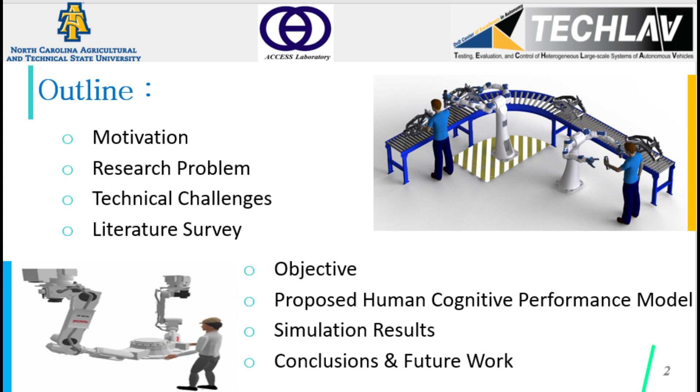This research is motivated by the rapid developments in robotic technologies, which have laid the grounds for the use of robots to develop a variety of applications based on human-robot interactions. These applications range from manufacturing, packaging, healthcare, warehouse management, and cybersecurity, to their economic impacts on future developments and intellectual and cognitive skills. It is not far that humans and robots will collaborate at the workspace to achieve common goals to improve the efficiency in handling the shared tasks in a human-friendly and secure work environment.

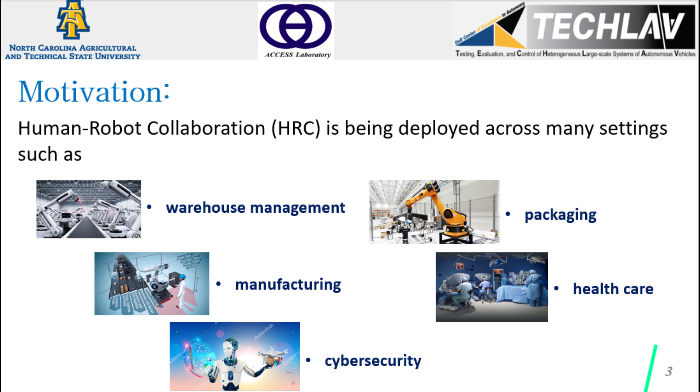The integration of human decision-making into a human-robot collaboration framework minimizes the chances of deviations in job handling from the expected and desired behaviors through conceptual coordination against the involved uncertainties. Before discussing the technical challenges of this paper, let's briefly review our research problem.

In a human-robot collaboration setting, human cognitive performance can be impacted by human cognitive workload, robot performance, and human physical performance. Then, the research problem is to develop a mathematical model to describe the relationship between human cognitive performance and the contributing factors, including human cognitive workload, robot performance, and human physical performance. Further, we are interested in understanding the relationship between human cognitive performance, task complexity, and the robot's performance.

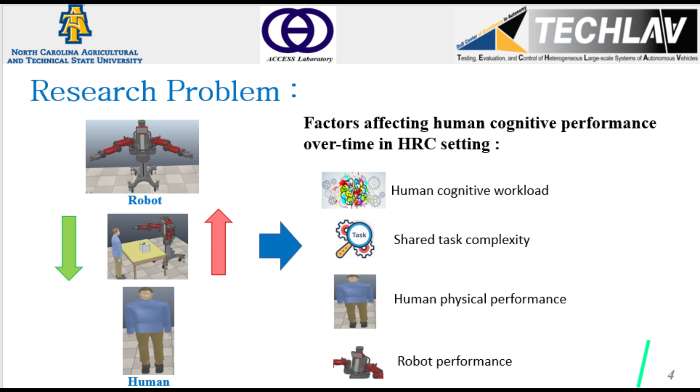So what are the challenges of mathematically quantifying the human cognitive performance over time in a human-robot collaboration setting? Various challenges exist that are very much difficult to quantify. Some of the notable challenges are the human cognitive workload and/or the human physical workload, the shared task complexity, and the performance of the robot. Due to those challenges, mathematically modeling the human cognitive performance in a human-robot collaboration setting is a big issue.

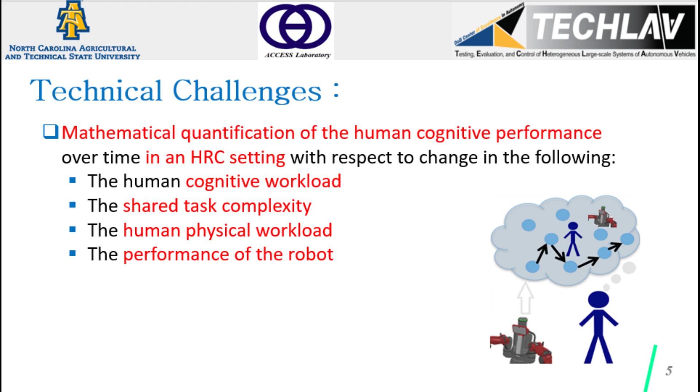In the literature, several techniques have modeled human physical performance in human-robot collaboration settings. However, a more comprehensive model is needed to describe a human operator's performance in terms of both physical and cognitive performance in a human-robot collaboration framework. In an attempt to address this problem, the researchers have proposed a linear relationship between human cognitive performance and robot performance. These results do not describe the mathematical relationship between the human cognitive workload and the contributing factors such as task complexity and human utilization.

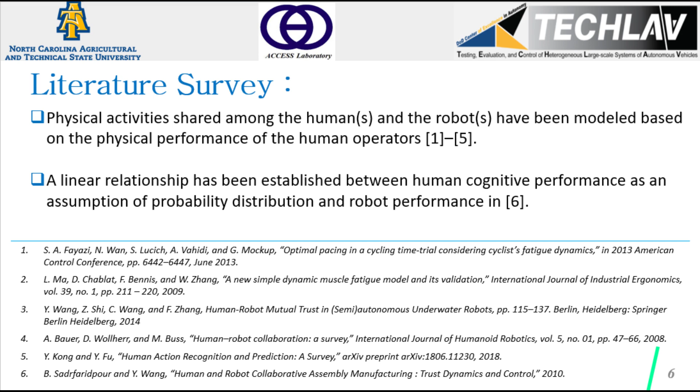Recognizing the limitations of the existing research, we propose a novel, effective, time-driven mathematical model for human cognitive performance within a human-robot collaboration framework. Human cognitive performance indicates a human's cognitive capability to perform mental work. The proposed model considers human cognitive performance as a function of human cognitive workload, robot added workload, and human physical workload. Here, we refer to robot added workload as the workload added to the human operator due to the robot's mistakes. The proposed model considers the cognitive workload as the dominant factor in quantifying human cognitive performance. Further, the developed model takes into account the effect of human physical and robot performances on human cognitive performance.

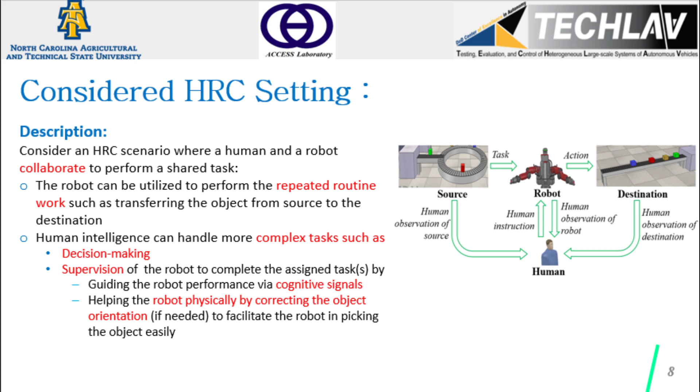If the robot commits a mistake in picking or placing the objects from or in wrong conveyors, the human operator sends the robot corrective signals, for example in the form of push-button, vocal, or EEG signals to correct its actions and guide it for successful completion of the task. Once the object is available on the destination conveyor, the human operator controls the conveyor to transfer it out of the workspace. If the robot did not perform the immediate preceding task satisfactorily, the human operator instructs it to correct. The interaction between human and robot increases human utilization factor and cognitive workload.

We earlier mentioned the robot performance has a significant impact on the human cognitive workload during the collaboration between the human operator and a robot. Robot performance is measured in terms of its capability to accommodate a human operator's instructions.

The robot performance, RP, for a given time instant t depends on its success in the completion of tasks, which can be modeled as given in equation 1, where RP max is the maximum value of the robot performance, PMR is the robot's mistake probability, SR is the source rate or the feeding rate of source conveyor, and DR is the delivery rate or percentage of items being handled by the robot and put on the destination conveyor at the preceding time instant.

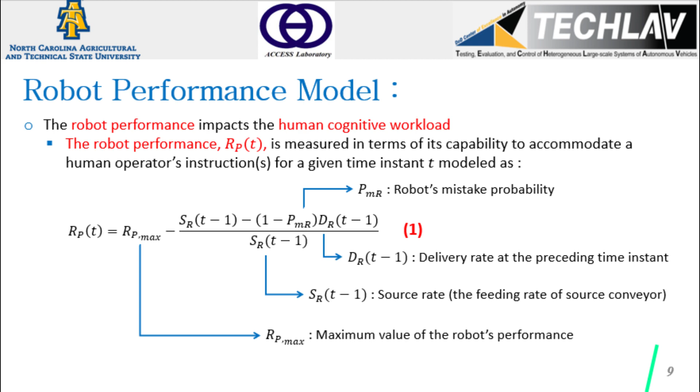Another factor that impacts human cognitive performance is the human physical workload, which in turn is related to human physical performance. A human's physical performance can be related to the muscular contraction and expansion system and can be tied to the fatigue level of the muscles and their recovery, that can be modeled as given in equation 2, where PP is the human physical performance at time instant t and FTH stands for the threshold force, which is calculated at the equilibrium point where the fatigue and the recovery balance out each other.

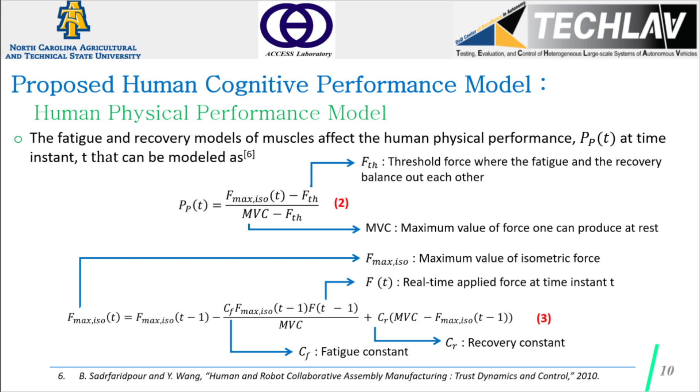Fmax ISO stands for the maximum value of isometric force. MVC stands for the maximum value of isometric force that one can produce at rest or the initial state or zero level of fatigue. Clearly, the maximum value of isometric force decreases over time due to muscle fatigue, that is represented in equation 3, where CF and CR stand for the fatigue and recovery constants, respectively, and F denotes the real-time applied force that reduces over time due to the increase in fatigue levels. In this model, fatigue and recovery processes are used to describe the dynamic evolution of the maximum isometric force.

A major contributing factor to human cognitive performance is his or her cognitive workload. The cognitive workload refers to the amount of mental work to be performed in a given period. A human operator's cognitive performance degrades for high cognitive workloads and or while handling complex tasks. During the inactive mode or when no cognitive work is performed, the human operator's cognitive performance level gradually increases up to the optimum level of arousal point.

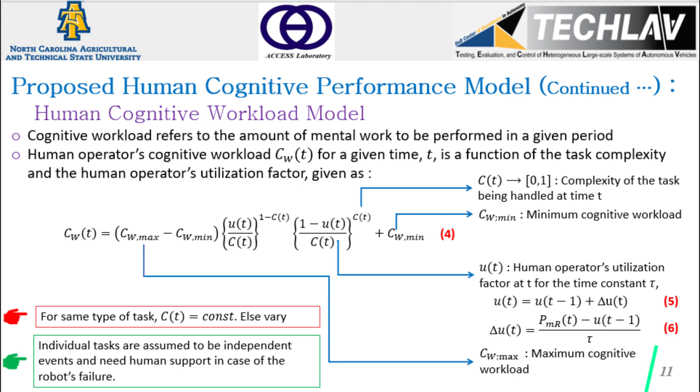If the human operator is doing the same task all the time, then the task complexity will be a constant number, otherwise, its value changes depending on the task being handled. In the proposed human-robot collaboration framework, individual tasks are assumed to be independent events. Further, a task either can be failed by the robot, which requires the human operator's intervention, or it will be successfully handled by the robot, which does not need the human operator to be utilized.

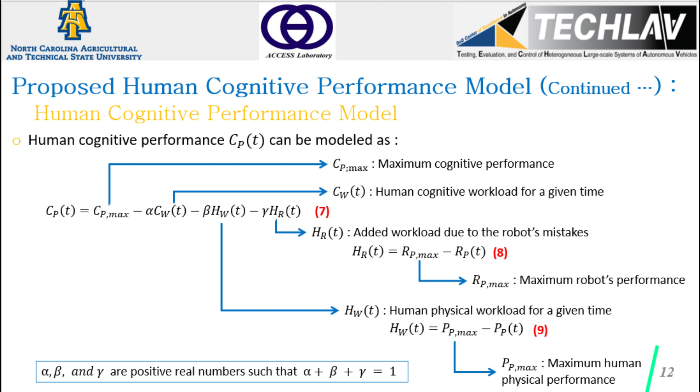As earlier mentioned, human cognitive performance is a function of human cognitive workload, human physical workload, and the additional workload due to the mistakes of the robot. Incorporating all these factors, human cognitive performance, CP, can be modeled as equation 7, where CP max is the maximum cognitive performance, CW is the human cognitive workload, HW is the human physical workload, HR is the additional workload added due to mistakes of the robot, and alpha, beta, and gamma are positive real numbers with alpha plus beta plus gamma equals 1. We would like to highlight the fact that with this model, the human's cognitive performance is at a maximum when it is subjected to a minimum workload, no fatigue, and maximum robot performance.

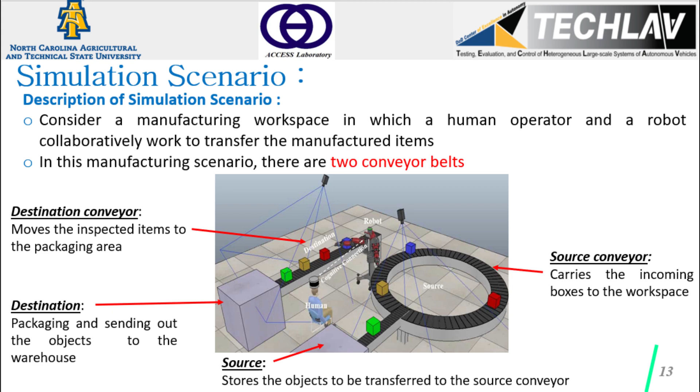To validate the proposed human cognitive performance model, we consider a manufacturing workspace in which a human operator and a robot can collaboratively work to transfer the produced items as symbolically shown in this slide. The source conveyor carries the incoming boxes to the workspace, and the destination conveyor moves the inspected items to the packaging area. The robot's task is to physically move the objects from source conveyor to destination conveyor based on the human's instructions. The human operator supervises and instructs the robot to complete its task correctly. The human operator is assumed to help the robot by physically changing the object orientation appropriately so the robot can pick the object easily.

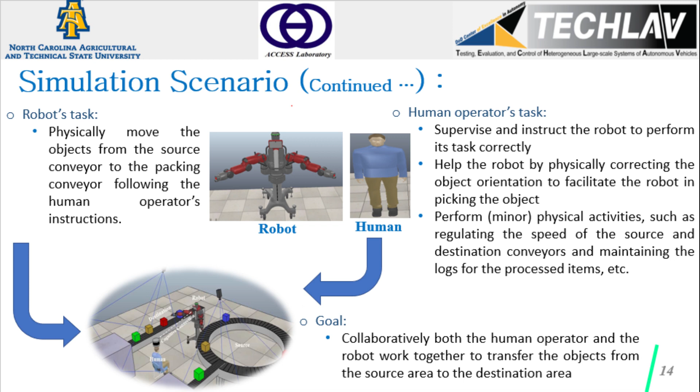Also, the human operator is involved in minimal physical activity, such as adjusting the orientation of the objects on the conveyor, regulating the speed of the destination conveyor, maintaining the logs, etc. Collaboratively, both the human operator and the robot work together to transfer the objects from the source area to the destination area. To simulate this scenario, we use the derived set of equations, which were discussed in the previous slides.

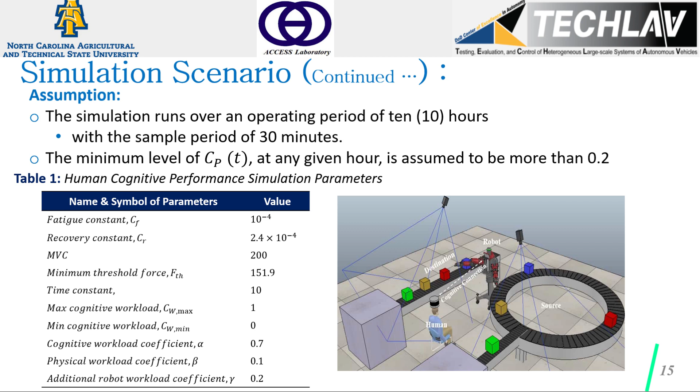For these equations, to run the simulation, the parameters are chosen as summarized in Table 1. Since in human cognitive performance, the human cognitive workload is a dominant factor, the value of alpha is selected larger than the values for beta and gamma. The simulation runs over an operating period of 10 hours with the sample time of 30 minutes. The minimum level of human cognitive performance at any given instant is assumed to be more than 0.2, below which the human operator is considered to be incapable of performing the cognitive workload. In order to maintain simplicity, the robot's mistake probability has been assumed to be constant over time.

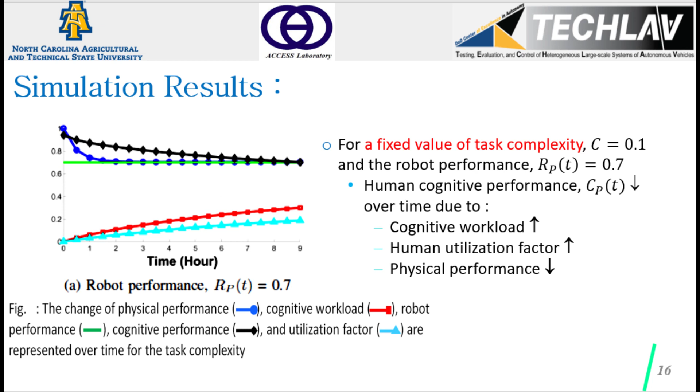The figure in this slide shows the simulation results for a fixed value of task complexity equals 0.1 and the robot performance equals 0.7. The graph shows that over time, cognitive workload increases, the human utilization increases, and human physical performance decreases. These changes result in decreasing human cognitive performance over time.

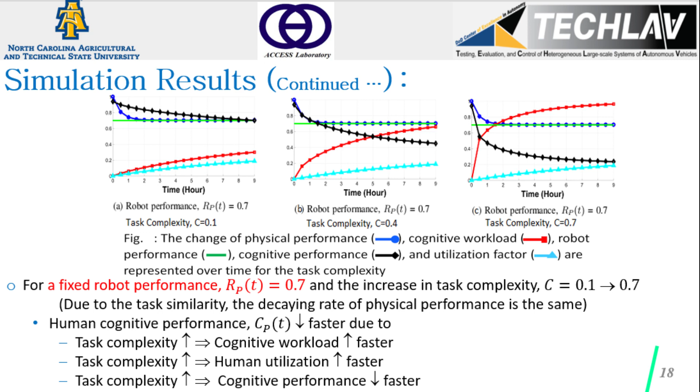The figure in this slide shows the simulation results for a fixed robot performance equals 0.7 and the increase in task complexity from 0.1 to 0.7. Similar to the previous simulation, we assume the task is similar at all time instants, and therefore the decay rate of physical performance is assumed to be the same. Again, similar to the previous simulations, it can be seen that over time, cognitive workload increases, the human utilization increases, and human physical performance decreases. These changes result in decreasing human cognitive performance over time. Further, the results show that for higher task complexity, the cognitive workload increases faster, human utilization increases faster, and hence, human cognitive performance decays faster.

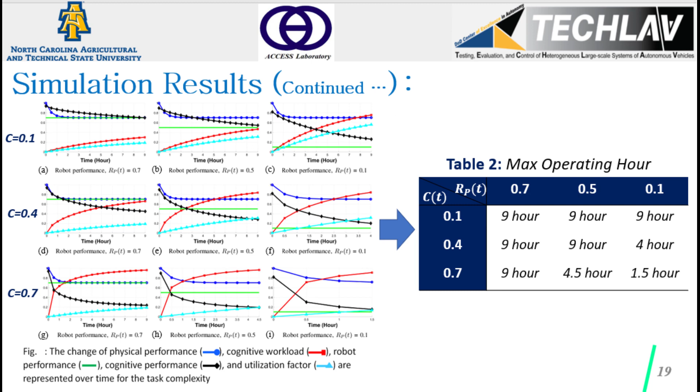The overall simulations are shown here for 3 different task complexity values, each simulated for 3 different values of robot performance. Analyzing the results, it can be seen that for a fixed value of task complexity, the human cognitive performance decreases, while its utilization factor increases for decreasing values of robot performance. The impact of task complexity on the performance values can be analyzed by comparing the results. For a fixed value of robot performance, the values for human cognitive performance decrease, while the utilization factor increases for increasing values of task complexity. Furthermore, it can be observed that in the subplots F, H, and I, the maximum operating time is less than 9 hours. This is because the human operator's cognitive capabilities have already exhausted and are below 0.2.

To conclude this presentation, we would like to highlight the following remarks. In this paper, a dynamical human cognitive performance model has been proposed for a human-robot collaboration framework with the associated modeling of human physical workload, robot added workload, and human cognitive workload and task complexity. This model has been simulated for a shared task between a human operator and a robot. Simulation results validated the proposed collaboration model and analyzed the effects of variations of the involved parameters.

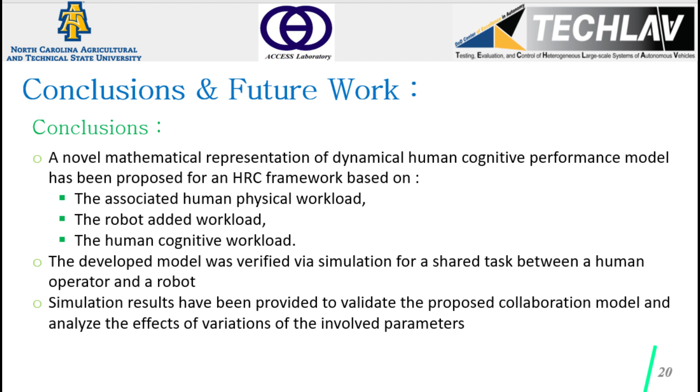The developed model and simulation results confirmed that the increase in cognitive workload decreases the cognitive performance, the decrease in physical performance results in decreasing the cognitive performance, the increase in task complexity causes a decrease in the cognitive performance, and finally, the improvement of the robot performance improves the cognitive performance for the human operator. In the future, we shall extend the model to establish human-robot collaboration involving multiple robots and multiple human operators with the consideration of complex task planning and resource management.